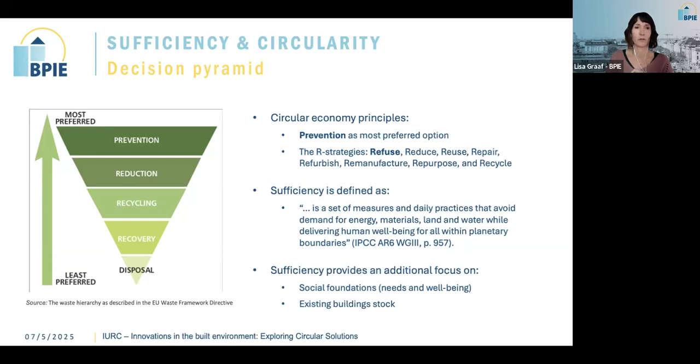And I think this dual dimension illustrates, if you apply it into the building stock, that it can be adjusted to meet the specific needs of countries and cities. It will mean different things in different contexts. For some, it means more floor area. For others, it might mean to think about real needs - what it means to provide good living quality for all, and right size or downsize, and make better use of what we have, and do this within the planetary boundaries.

Now, on the next slide, you saw the pyramid from the waste hierarchy. Here again, this illustrates what sufficiency means in the building sector. From most preferred, from a climate and environment perspective, is the preservation and renewal of existing buildings. That should always be the top priority, followed by the expansion of existing buildings. And sometimes, especially beyond Europe, it will mean also new construction guided by sufficiency principles. And then there should also be one step in the most preferred, which is sharing invisible living space. You will hear about that when I get to the examples.

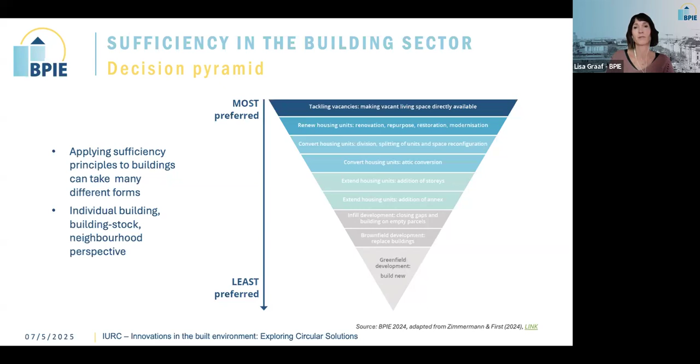And you may say that this is somehow also a common sense approach, but somehow it also seems radical, because it goes against the mainstream, or the norms, our current economic model, which is very much focused on building new and starting with this. So next slide - what we know about the impacts. Let me summarize some of our main findings when we looked into the literature and also from our case studies. Next slide, please.

I listed the studies, and you can also find most of them in our BPIE report and the report we did for the EU Commission on sufficiency. But let me tell you that the evidence is clear that there are huge saving potentials, greenhouse gas saving potentials, while at the same time it can really help save resources.

Studies show about 60% less resources compared to scenarios where you would need new construction, because you need materials for conversion and renovation, but much less than if you build new.

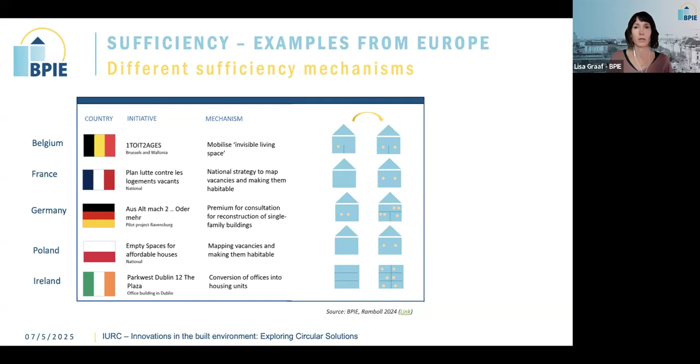So how many units have been converted, how many rooms sublet in the dense student cities in Belgium, how many vacancies brought back to the market. We then compared this to average construction-related emissions for an equivalent area of new build construction.

And we see there is really high potential, and you will also see - we just looked here at greenhouse gas saving potential. Now, next slide.

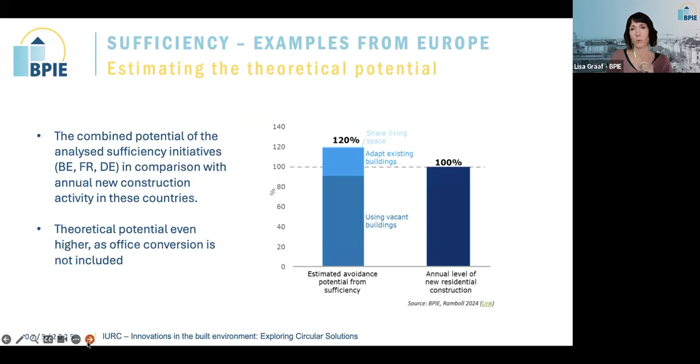When we combine the different sufficiency mechanisms and the theoretical potential we estimated, if this were scaled up - and this is just for illustration purposes - it still shows that we could free up more space than is required to be built each year. Next slide.

I also always like to highlight this because quantification numbers are very valuable and very much needed. But when we talked with interview partners of the initiatives and analyzed the documents about what has been achieved, one very interesting finding was that none of those initiatives have been done with climate considerations in mind, or at least this was not in the forefront, which was our starting point.

But they mention a whole lot of other benefits and main motivations to launch it, for example, to combat loneliness and provide affordable housing for students, community building and intergenerational exchange. They mention preservation of historic and cultural value, revitalizing regions like France plans to combat vacancies, to comply with land use targets. And they also mentioned the avoidance of additional infrastructure costs for municipalities, because new infrastructure comes with associated embodied carbon.

And if you don't build new on the greenfield, but stay within the existing structures, you save that from a municipality's point of view. And then I could also add capacity building on how to handle vacancies, that was within the France plan. But I see time's running, so I think this is the last slide already. So, our recommendations.

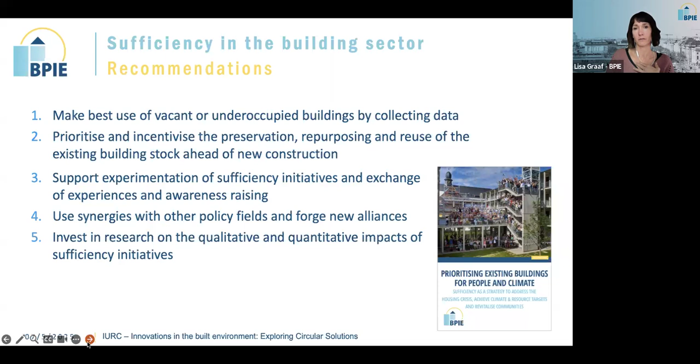Thank you very much, Lisa, very interesting. I will give now the microphone to Carolyn Kovar from Atlanta, someone that is working on the ground with these initiatives. We have all these expectations and hopes of what cities can do, so perhaps you have a few reflections on what Lisa just presented. Over to you.

Absolutely. Good morning everyone, thanks for joining. So I'm happy to be here today to learn from the experts in the room, just such excellent data.

From the Atlanta perspective, we're working most readily on the first two of the recommendations that Lisa shared, so I did want to share those reflections. The first is how to utilize data to understand what the portfolio of the built environment in your city is for redevelopment. So we partnered at the City of Atlanta with a data tool, Tolemi, which a number of other municipalities have also partnered with. They actually created a data tool which maps out the vacant single family properties, as well as those that have in rem action or demo lien action.

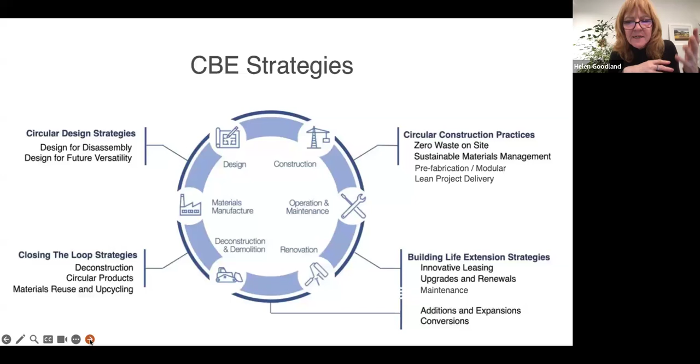When we talk about circularity in the built environment, we take a very practical view. I think definitions is something we struggle with in this area. We're looking at the life cycle of the building primarily, from when it is designed, when it is built, some of the life extension strategies, and then what happens when we're trying to close the loop so that those resources in the building are retained for the highest and best value future and subsequent lives.

We have really been looking at a lot of these projects through the lens of what's happening in Canada, but I hope there's resonance with most jurisdictions. So it's important to set a little context about how the regulatory environment is embracing circularity, and what tools and levers we have to start to adjust and drive change.

In Canada, we have primarily the building codes, and those cover both new construction and retrofits to some extent. I could probably spend an hour on the issues and challenges of retrofit codes and the extent to which they actually help or hinder circularity.

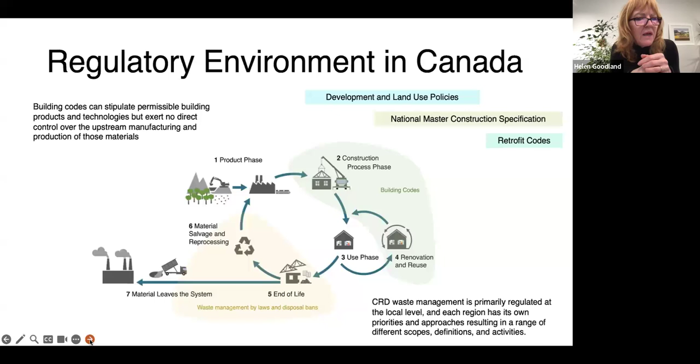But when it comes to end of life and closing the loop, the regulations tend to be administered at more local levels. And here there's all sorts of different approaches, metrics, definitions, what's included, what's not included, how you calculate, how you don't calculate. Something we have found over the years is it's really important to focus on the end of life and closing the loop areas of the building life stages from a regulatory perspective. It's the hardest part for sure.

So within that context, something we have been doing with the Canadian Standards Association over the last 5 years is really trying to understand the role that standards play to inform and support those regulations, both at the national scale with building codes, but also at the local scale with waste management and end of life. We've looked at probably over 250 standards now that relate to buildings.

And this is just CSA. There are 50 other standards organizations, each with their own roster of standards - ISO, ASTM, ASHRAE, BSI, the British standards that we're finding are percolating into North America as well. So this is an enormous task, but it does really give regulators the tools they need to start to explain what it is they're looking for when they talk about circularity.

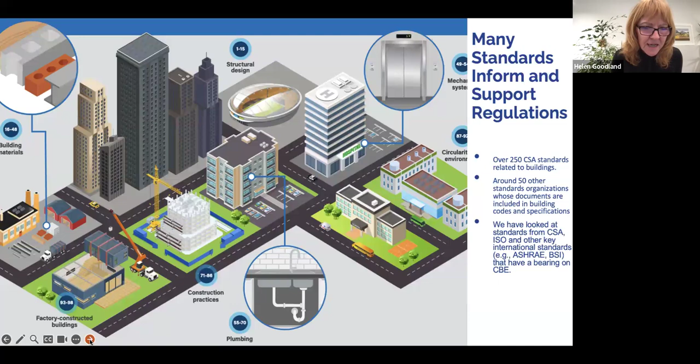The state of play in Canada right now, I think, is probably fairly similar to most places. On the one hand, it's very encouraging - there are quite a bit of actions going on to embrace circularity. I would say most of the leadership is coming from the municipal and regional level.

But nevertheless, we're seeing quite a lot of things going on, from updating of building codes, digitization of codes to make it easier for architects and engineers to engage efficiently with the regulatory world. There's just a whole host of different green building policies that touch on waste management and reuse of materials. We're seeing increasing emphasis on embodied carbon guidelines. The city of Vancouver, for example, has got some really important, groundbreaking I would say in some cases, policies and regulations around embodied carbon reporting.

There's a lot of deconstruction policies, voluntary programs, green materials policies. We have a Wood First initiative here in British Columbia, but there's also, at the local level, low carbon concrete requirements in some cases. I could go on.

I think the point on this slide is it's still a bit scattershot - there are a lot of different things all happening. They're not necessarily talking to each other, and they're not necessarily taking a joined-up approach. So from the industry standpoint, it's really hard to know where to start. Green procurement may be defined one way over here, and a different way over there. So the point to take away is that we still lack an aggregator and a consistent voice and consistent definitions when it comes to circularity in Canada.

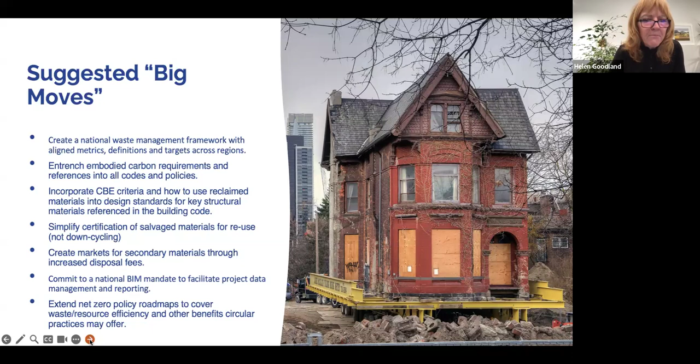So just to summarize some big moves - these are big things that we've found regulators can start to think about over the coming weeks, months, years, decades, as they think about circularity in their jurisdiction. In Canada, I would propose we really need to create a national waste management framework so that all the different jurisdictions are speaking the same language. We need to entrench embodied carbon requirements right across all codes and practices. It's happening - the National Building Code is starting to do this, but we won't see it fully implemented for another 7 or 8 years. We need low carbon materials and so forth.

So I want to get to some project examples. The next slide shows a few tastes of where we're at. And I know there's an emphasis today on housing.

There's a really interesting program underway in Alberta where they are converting office buildings into residential. This is because both Edmonton and Calgary have been struggling with the 2008 downturn in the oil and gas market, where a lot of headquarters are in Alberta, but also post-COVID, a lot of offices were really underutilized. So the Calgary office downtown development incentive program was launched in 2021, and it offers $75 a square foot that can go towards the conversion cost of an office building into residential. They've done over a dozen projects so far - this is a really good return on investment for the city, and it's starting to see these conversions get underway.

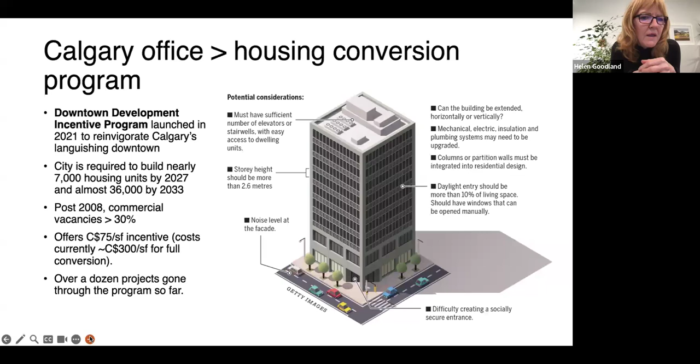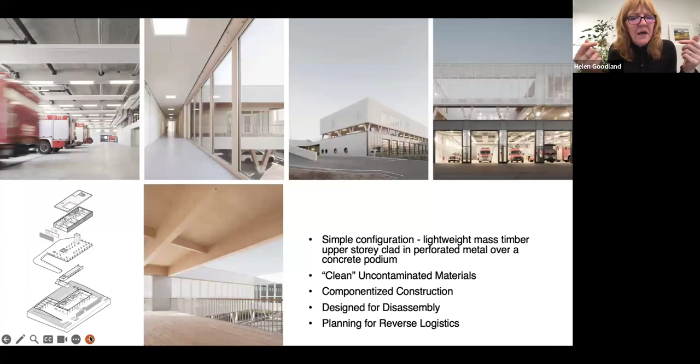As a stretch goal - those of you in Europe probably know this project - Straubenhardt is a small town in Germany that has fully embraced cradle-to-cradle principles, and they've just completed their first cradle-to-cradle project designed by Wulf Architekten. You'll start to see some of the features of this project, which we think really need to be promoted. It's this notion of clean construction and the use of uncontaminated materials applied to a very simple, rational, configured project. This means that during the life of the building it can be easily maintained - there are no contaminants to address when the building is disassembled, and it's been designed so all the different components can be taken apart. It's bolted, not glued, so all those forever chemicals you often find in buildings aren't a problem to deal with.

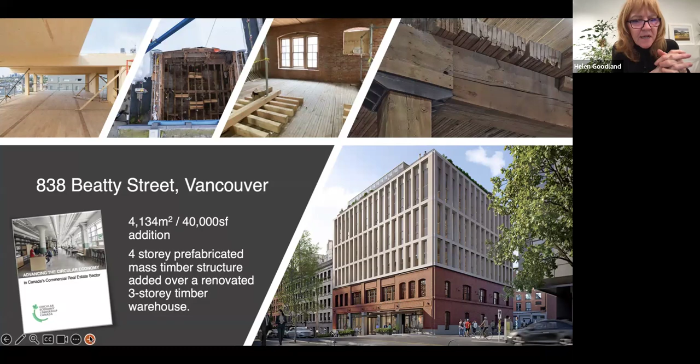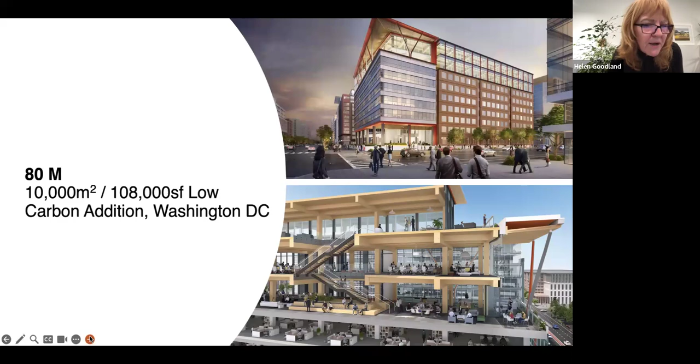I wanted to talk very quickly about mass timber. This is a material that has been gaining prominence in British Columbia particularly - I'd say Canada has become a leader in using mass timber. If you click on the video in the top left, you'll be able to see the construction of this project on Beatty Street in Vancouver. This is putting a mass timber extension on top of an existing commercial building, and it really helps make the case for adaptive reuse, because mass timber is a much lighter material. It's been done across North America - there's another one in Washington, DC.

We have been promoting the idea of cities as a convener of the ideas exchange. A project we're leading on behalf of BC Housing is an exchange between the cities of Vancouver and Vienna, where there's a Vancouver house being built in Vienna and a Vienna house being built in Vancouver.

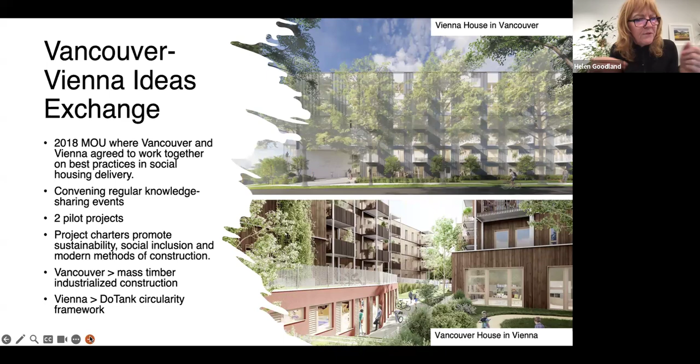And these projects are offering the opportunity for the two cities to share best practices in sustainable low carbon building. This really is a precursor to circularity, that you've got very low carbon buildings and the opportunity to learn from different experiences.

So just to give you an example, the city of Vienna has been working to implement its DoTank solution. This is DoTank 2030, and this has really codified the reduction in consumption-based material footprint by 30%. So this is a really concrete solution to decarbonizing the city.

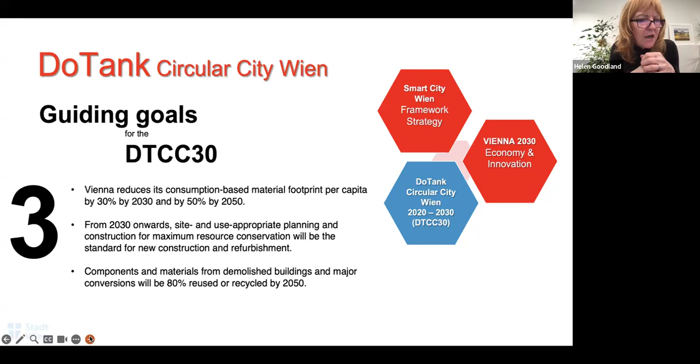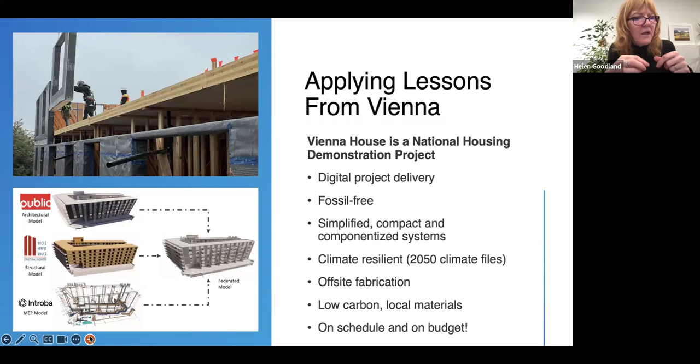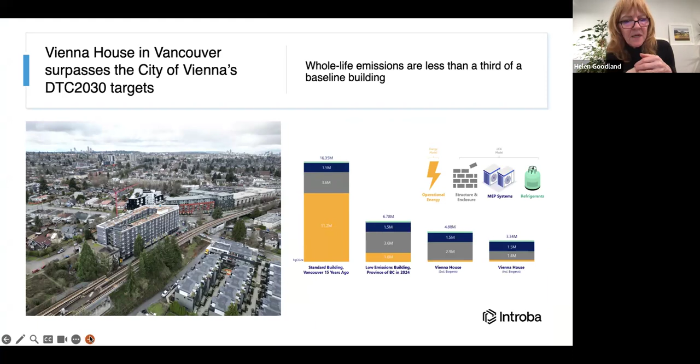And what Vancouver has done is taken those lessons from Vienna and applied it to a project in Vancouver. So Vienna House is low carbon, and you can see here how significantly low carbon it is compared to a baseline building. All the way to the right is the Vienna House carbon analysis, assuming that the biogenic carbon is included. The second from the right is if it's not, but you can see how much less it is from a baseline building.

So if you're starting to plan and you want to know where to start, something that we have been working on with major property owners, and of course cities and jurisdictions are also major property owners, is we've been using CRREM, Carbon Risk Real Estate Monitor. This is a really useful tool to help plan out the decarbonization strategy, so if you've got multiple buildings, you can start to look at that portfolio in the context of the decarbonization commitments that your country or community have made through to 2050.

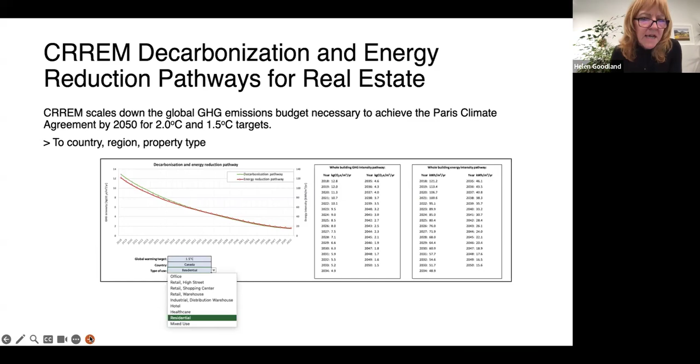So if you go to the next slide, we can benchmark your projects based on CO2 emission reduction, whether you're working towards the 2-degree reduction target or the 1.5-degree reduction target as set out in the Paris Climate Agreement. We've done this for a major property owner, and you can see, through to 2050, where all of the different projects essentially get to the point that the carbon emission costs and risks associated with it become so economically unviable in the markets that they operate.

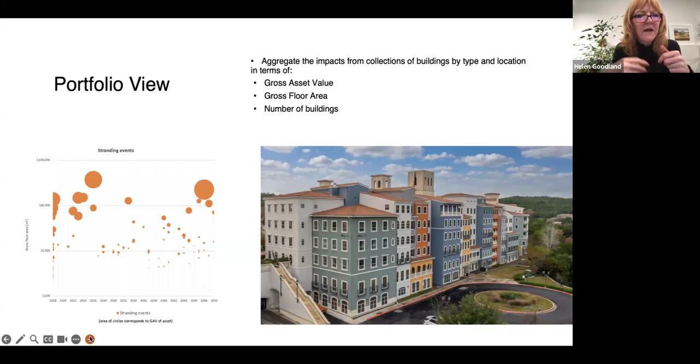So if you have residential buildings, commercial buildings, healthcare, institutional, all of these things can be looked at, and they get to a point where they become so expensive to maintain because of the rising cost of carbon mitigation, that this is the point at which you need to have done that retrofit. And you can aggregate those impacts based on gross asset value, floor area, number of buildings, and so forth. But this gives you a really important view on where you can start and what you can do.